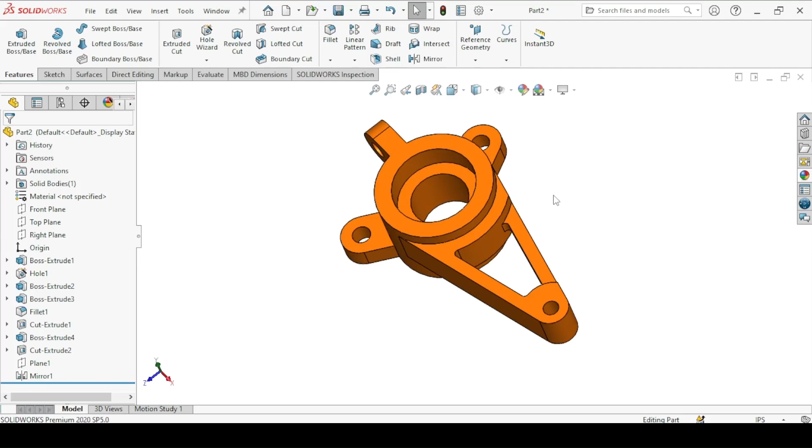We can now start. We are inside the SolidWorks 3D modeling workspace. The first thing you're going to do is model the cylinder, which has a diameter of 9 inches and a height of 6 inches. Inside the cylinder we also have a counterbore hole. So let's first create the cylinder.

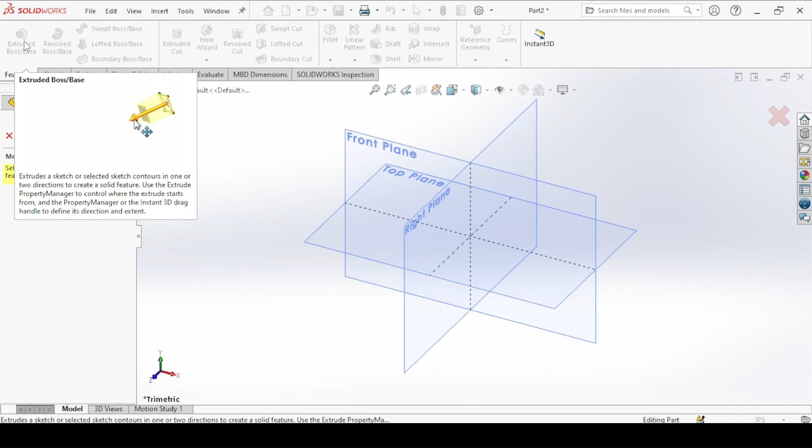Come to this bottom here and change the dimension to inches, pound, and second. Then we extrude because we are adding material, using the extruded boss base feature. Click on the top plane and draw a circle of diameter 9 inches from the center, then exit, and set the height to 6 inches.

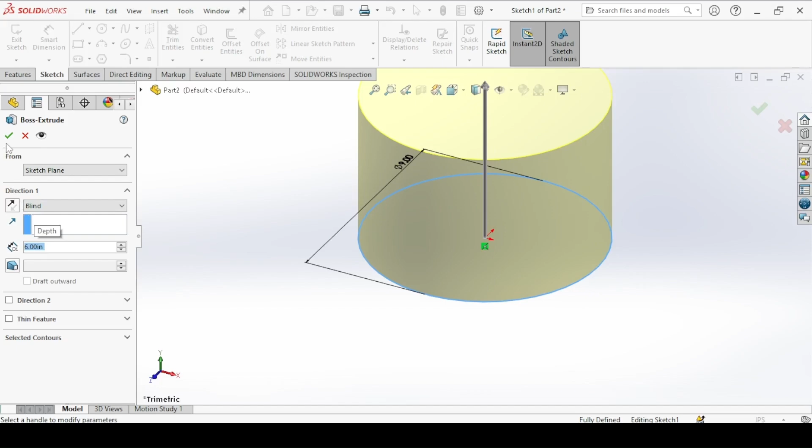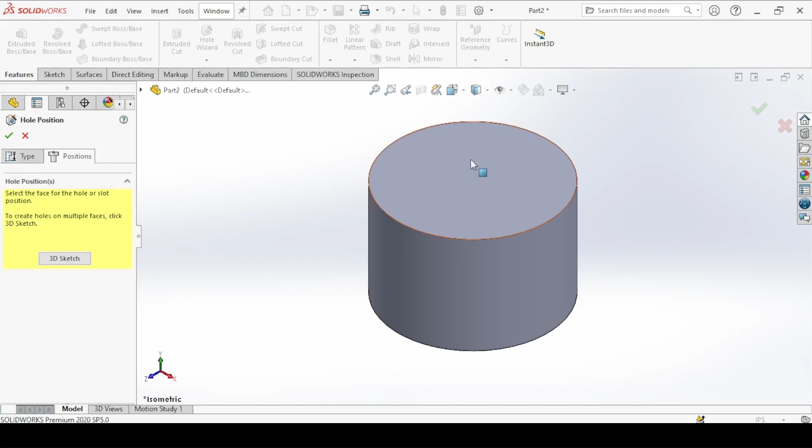Next we add the counterbore hole inside, using the hole wizard. Select the legacy hole, and the type should be a counterbore hole. The counterbore diameter, looking at the top view, is 6.4 inches and the counterbore depth is 2 inches. The hole diameter is 4.4 inches and the hole cuts through to the end, so set the end condition to through all. Under positions, click on the face here and place the center of the hole on this origin.

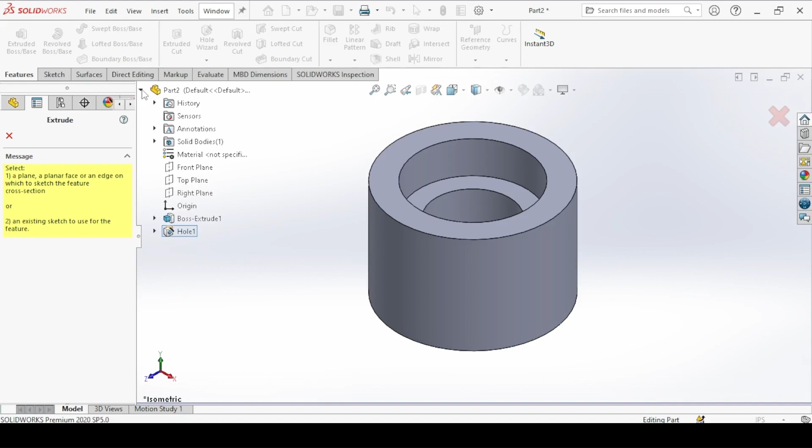Next, we add these two features as well. We extrude again because we are adding material. Click on this arrow and then click on the top plane. You're going to have center lines: a vertical center line, a horizontal one, and an inclined center line.

With the line tool for construction, draw a vertical center line here, a horizontal one here, double click to let go of the line, and then draw an inclined one as well. The angle between the inclined line and the vertical line is 30 degrees, making it a fully defined sketch. Then we draw this feature here.

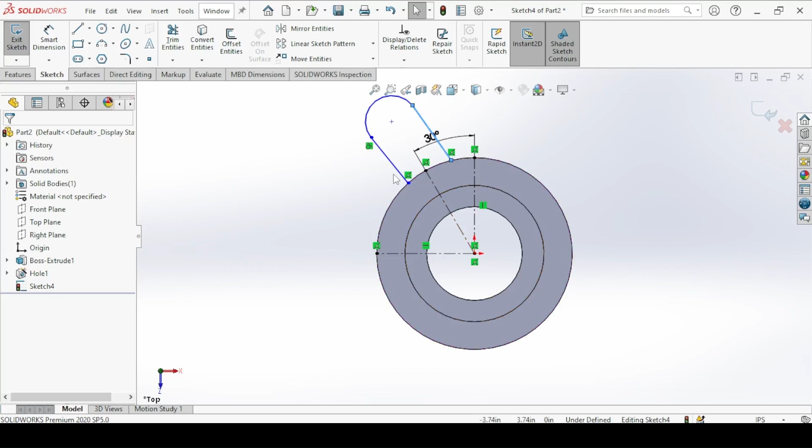With the line tool, draw an inclined line here, move your cursor here, come back, and draw an arc like this to close the shape. Now I want to make these two lines symmetric about this center line. So hold the shift key, click on the two inclined lines, then while still holding shift, click on the center line, and make symmetric.

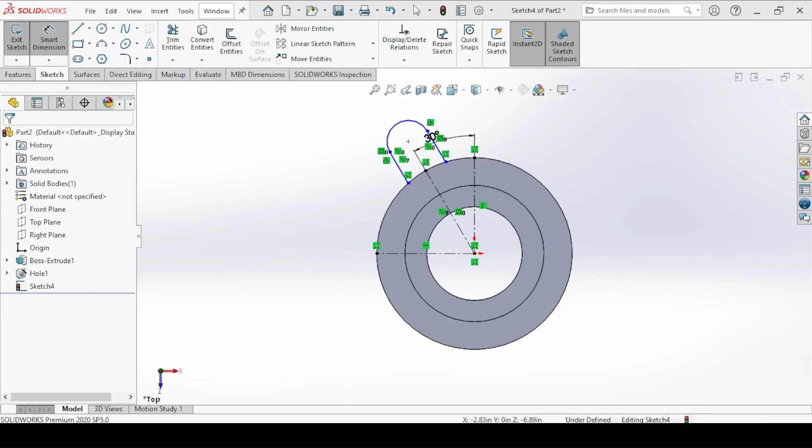Again, we make these two lines parallel, making the line parallel with the center line. Now we need a tangent relation here, so click on this point and apply tangent. The distance from this center to the center here is 6.5 inches, and the radius of the arc is 1.6. Now the sketch is fully constrained.

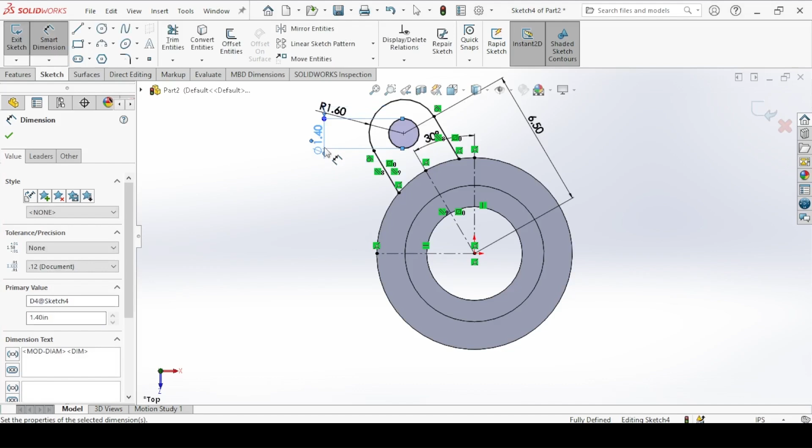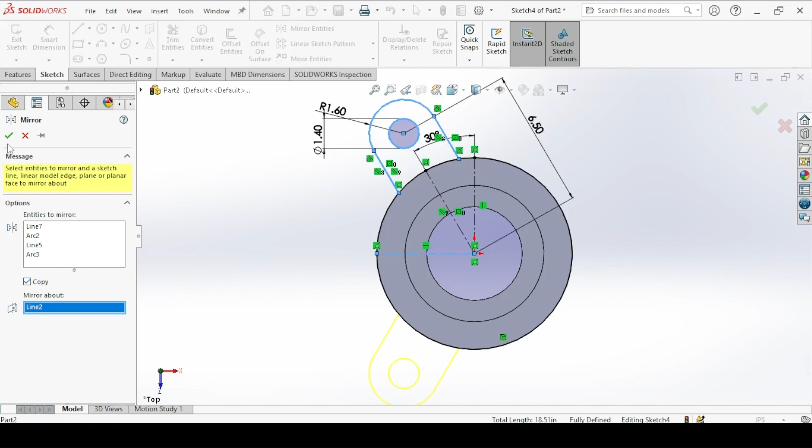Inside it we have a circle of diameter 1.4. With convert entities, click on this circle to convert it into the sketch, then mirror this onto the other side using mirror entities. Click on this line and these entities, mirror about this horizontal center line, and make sure you check copy. Then we can trim the unwanted arc, as we can see. The sketch is now fully defined, so exit.

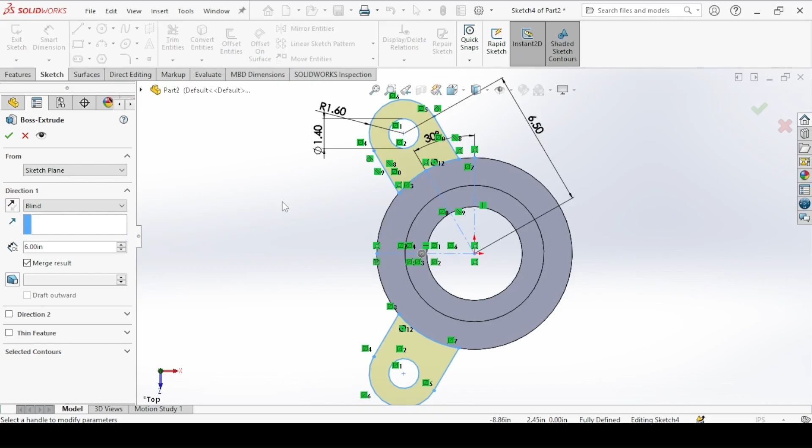The height of the feature is 1.6 inches.

Next up, we add this feature. We draw a rectangular block at the top here, add fillet edges, and bore the hole inside. Using extruded boss base, click on this face, and draw a horizontal line, vertical line, and horizontal line to close the shape. Now we need a center line from this center to this point.

Make sure these lines are symmetric about the center line. Hold the shift key, click on the 3 lines, and make symmetric.

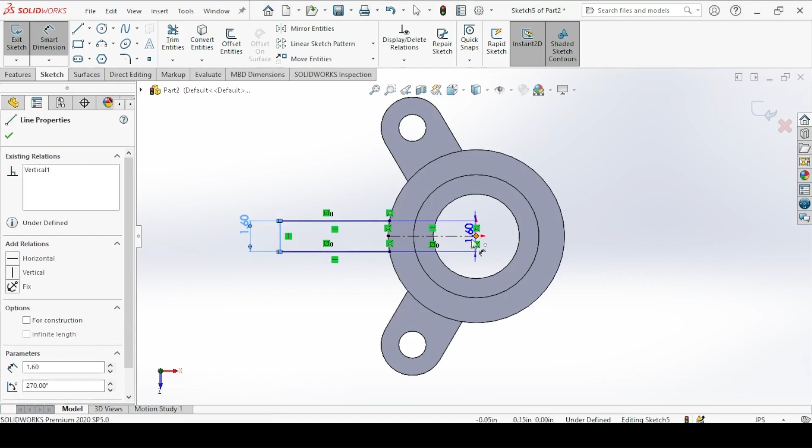The system calculates it as 8.1. The sketch is fully defined. Convert entities, convert this circle, and then trim the unwanted arc from it. So this is the shape you're extruding.

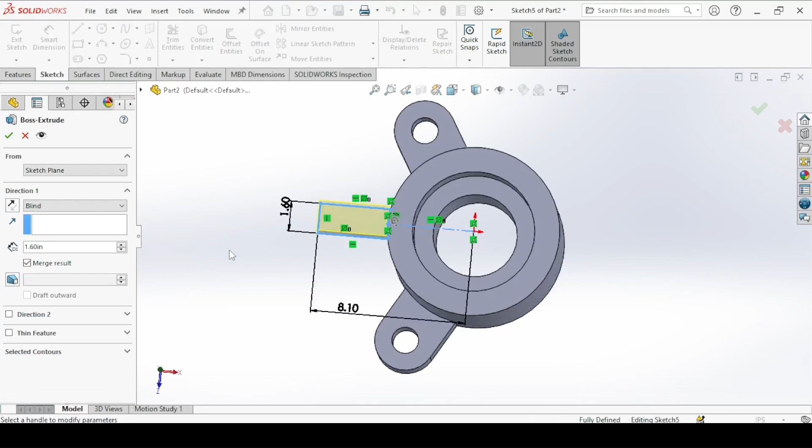We want to extrude down by the diameter of this arc, so that will be 1.6 times 2. Reverse the direction. Okay.

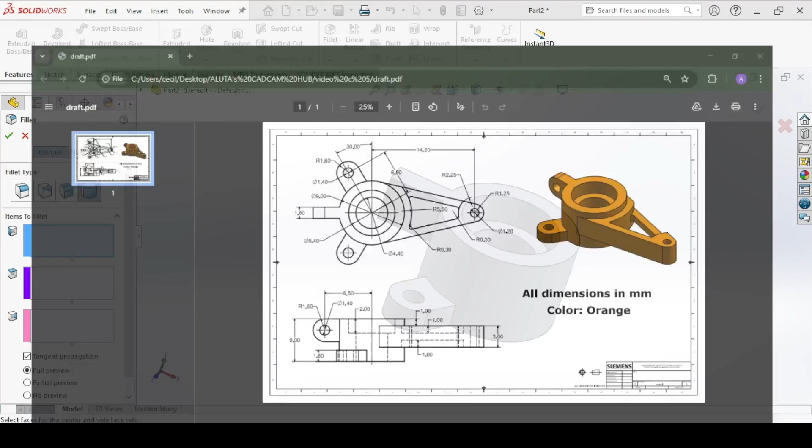Then you add fillets. Since the fillet is a full round fillet here, there is no need to use the constant size fillets. You just come to the full round fillet, the first face here, the second face on the top, and the third face on this top here.

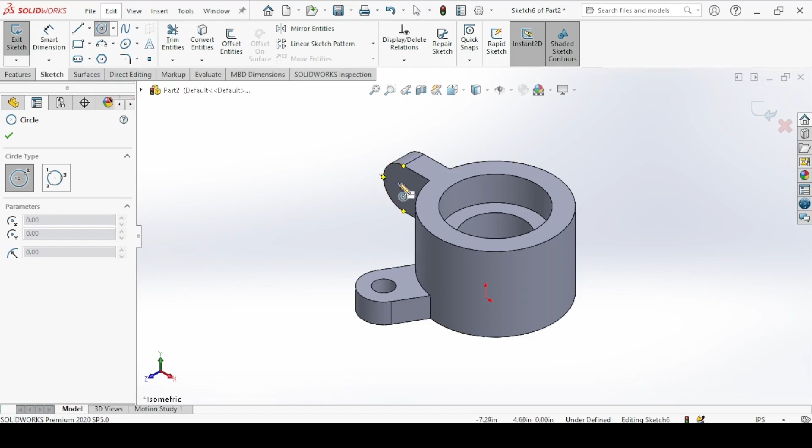Then you create a hole of diameter 1.4 through, so extruded cut on this face. Locate the center of this arc, the radius is 1.4 inches. Exit. Cut through and set the end limit to up to next. Okay.

Next we add this feature. This feature starts at a distance of 1 inch from this face here. So extruded boss base, click on this face, and when you're extruding, you are going to add an offset.

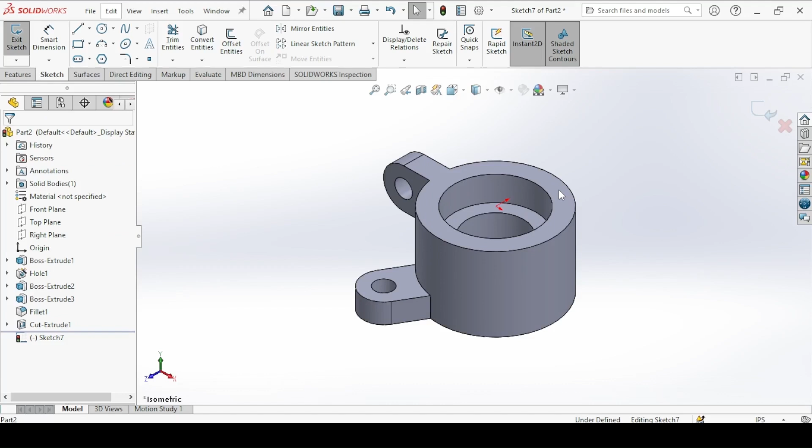So we have an inclined line, an arc, and another inclined line. Make sure these inclined lines are tangent to the circles. Hold the shift key, click on the inclined line and the circle, make tangent. Do the same for this side as well, make tangent. And click on this point, make tangent.

The radius of this arc is 1.35. The distance between these two centers is 14.2. Then we make sure these two centers are horizontally aligned. Click on the center, hold the shift key, click on this center as well, make horizontal.

Now we have an arc here of radius 5.5. Now the diameter of this outer circle is 9, so the radius is 4.5 because 9 divided by 2 is 4.5. Since this radius is 4.5 and this radius here is 5.5, the thickness between this arc and this inner arc will be 5.5 minus 4.5, which is 1 inch.

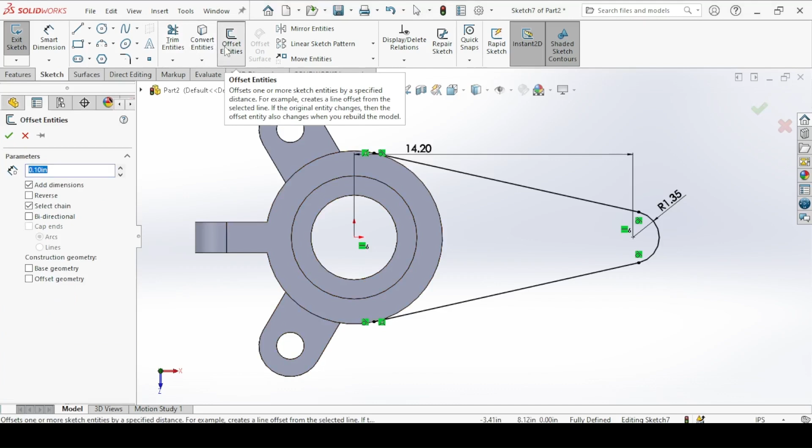This 1 inch thickness is the same on all the sides as well, so you're just going to use offset entities of 1 inch. Click on this line, this arc. Okay, so that's not going to be possible. Again, offset entities, click on this circle, 1 inch. Okay.

And have a circle of radius 2.25, so a diameter of 2.25 times 2. So trim the unwanted arcs from them as well.

Now I have a fillet of radius 0.3, so with a sketch fillet, a radius of 0.3 inches. Click on these 4 edges. Okay.

Then you have a hole of diameter 1.2 here. Convert entities and convert this circle. Okay, and then you trim the unwanted arc.

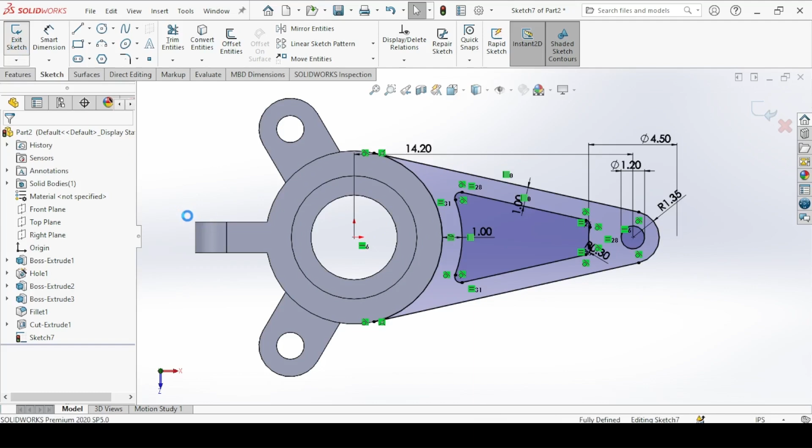So this is the shape you want to extrude. As you can see, this shape is shaded or colored. So exit sketch. Now reverse the direction.

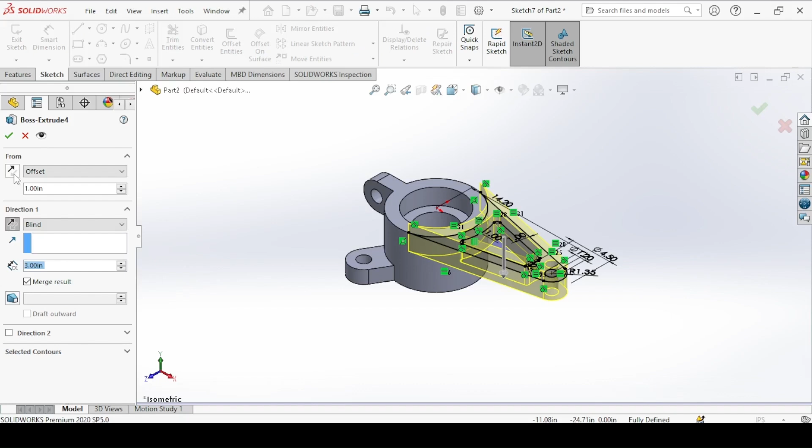You're going to have an offset of 1 inch before we extrude, so from offset of 1 inch, and then the actual extrusion distance is 3 inches. Okay, so we have to edit the feature and make sure the extrusion is coming, the offset is actually coming inside. Okay, so this is what we want.

Now we are going to create a cut of depth 1 inch of this feature, so extruded cut on this face.

We need this arc here and this arc here. So draw a circle and then bring the circle to this arc, again to this arc here.

You can just make them small, and then click on this circle, hold the shift key, click on this arc, make equal. Again click on this circle, hold the shift key, click on this arc, make equal, and convert this line, this fillet arc as well.

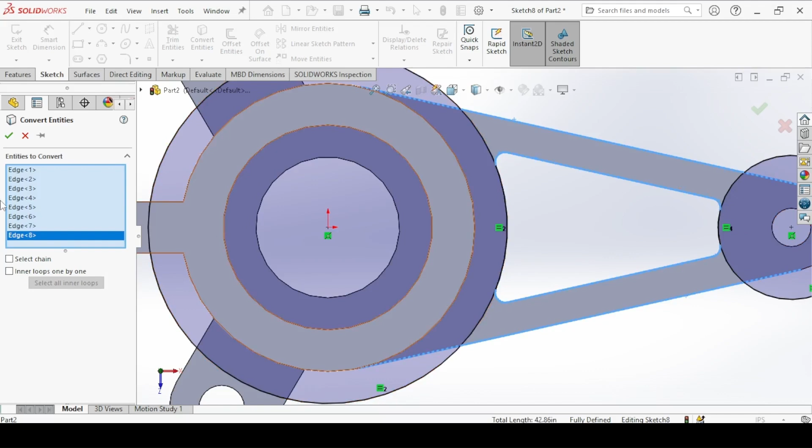Okay, and then trim this arc and these lines as well. So this is the shape you want to cut. Okay, so not this part, you can trim this, and trim these arcs as well. We just want one side here.

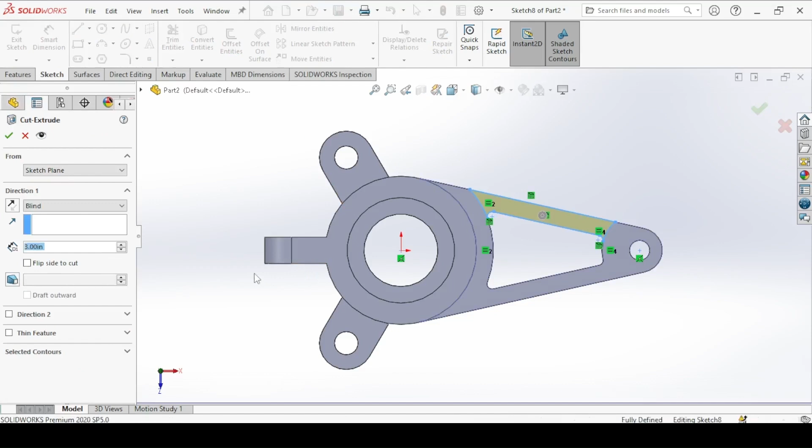As you can see, the shape is selected, exit, and we cut down by 1 inch. Okay.

We want the same thing on the bottom, so we are going to create a datum plane between this face and this face. Okay, not this edge, delete it, and this face. Okay.

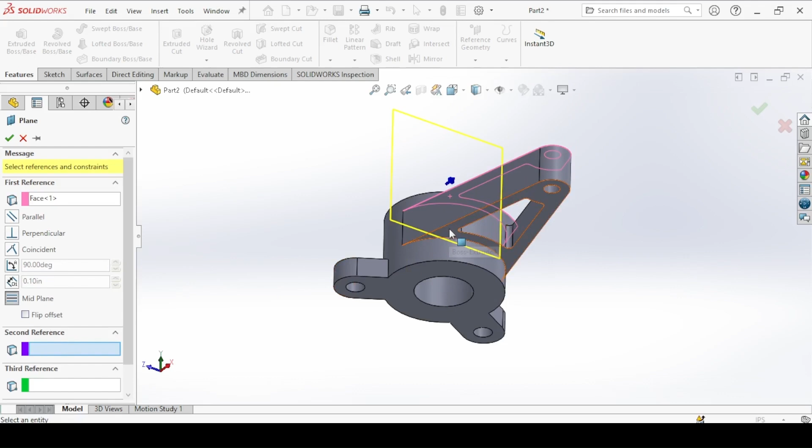And then you're going to mirror. So mirror, face or plane is this plane selected, the feature, this cut extrude. Okay, so as you can see, it has been mirrored onto the bottom here.

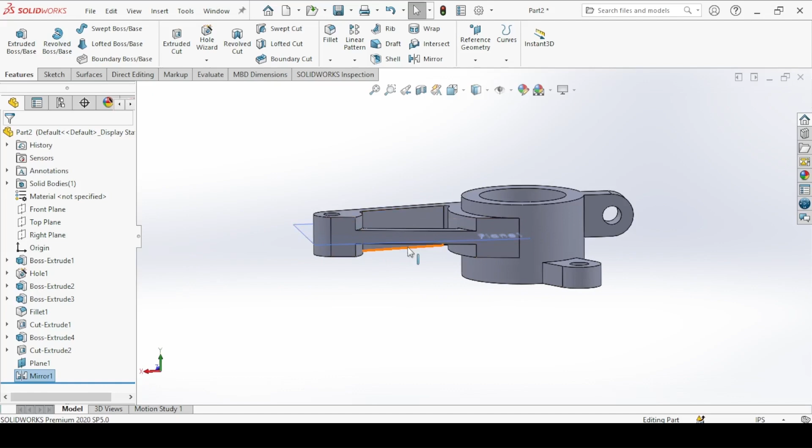So the color is orange. You can change the background to plain white and edit the appearance to orange. Okay, you can click on this datum plane and hide it.

And yeah, that's how to create this part using SolidWorks. I hope this video helped you out.